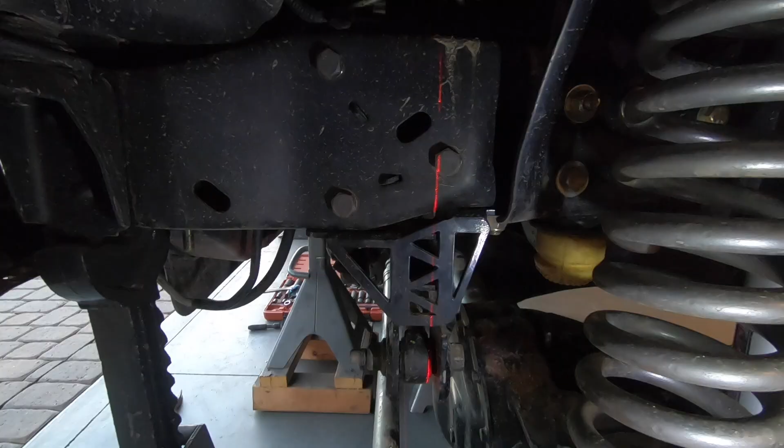Like I said on the last video, today we're gonna be working on the track bar. And like I mentioned in the last video, there's a few things that I want to change in this one. One of them is moving it back a little bit.

I basically have this laser kind of set up right here, showing where I want it. I essentially want the center of the track bar right here to match over there. So not at the ball joint, but kind of where before it starts diving into the ball joint. I want it to be straight. I don't want it to be off to the front like this one is.

So basically, this thing has to move back about half an inch. So I'm gonna take that into account when I'm actually designing mine in CAD.

So now with that being said, we also have to take this measurement, see how far up I want to go. Another thing that I'm gonna do is I'm actually gonna take off these lift springs. I have my original springs. I'm gonna throw those on here and then throw the truck kind of back on the ground and basically see how far up we have to go with this track bar.

And that's basically because I want to make the track bar work good on stock springs all the way up to these springs, which are 3-inch leveling springs, or lift springs. So I want it to work good in that whole range.

So we have the track bar that we had in our truck. This is actually the rough country track bar that they send you with the 3-inch lift kit — I call it more of a leveling kit. And then this is the OEM track bar bracket.

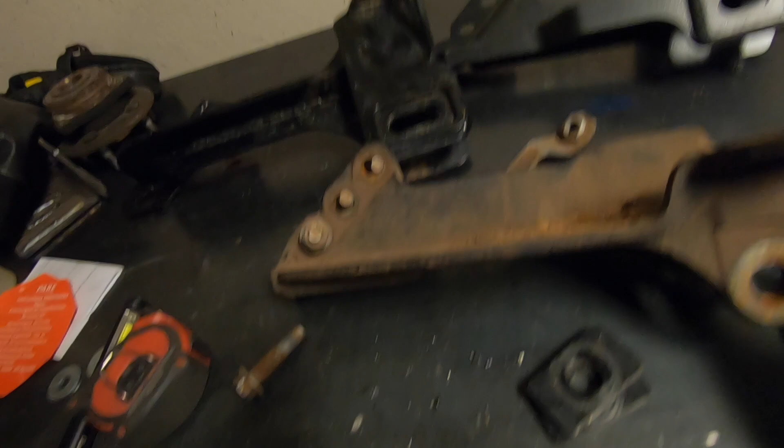I feel that I keep saying track bar. I know I can't talk. I really can't. But anyways, this is the OEM track bar bracket that you get with your 2008 through 10 trucks.

Honestly, out of all these 3, my favorite is this one. Now, I always thought that this was a drop track bar, and it's actually not. So from your mounting surface to the center of your hole is 2 3/4 of an inch, and that's the same on both of these.

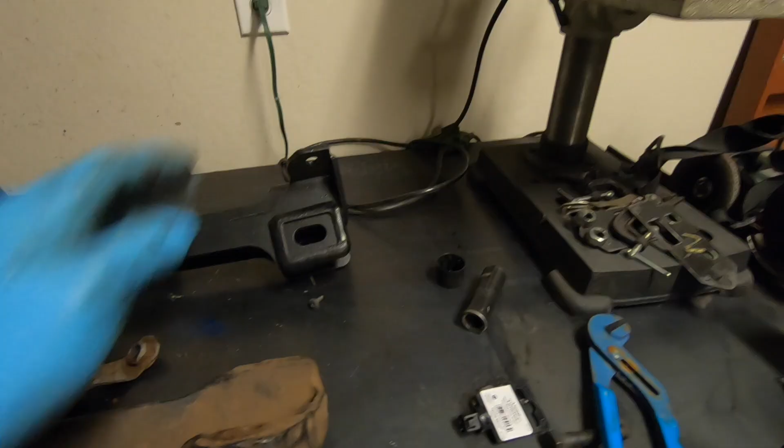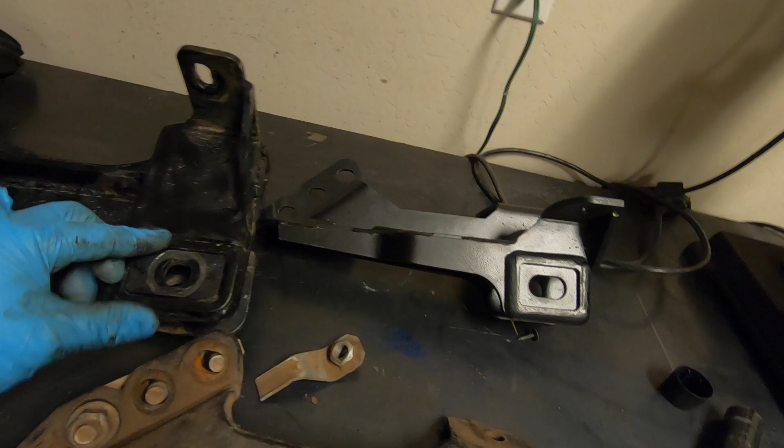The only thing they actually changed on this one is the mounting location for your track bar. As you can see, this one is slotted, and they include these shims that come with the track bar. It has 2 sets of shims—one that's offset to one side. This center one is what I was using, and with this one it'll be completely centered on that slot. The other has the hole offset to one side, so you can have it on this side, which throws your axle to the passenger side a little more, or if you flip it, it'll pull your axle towards the driver's side.

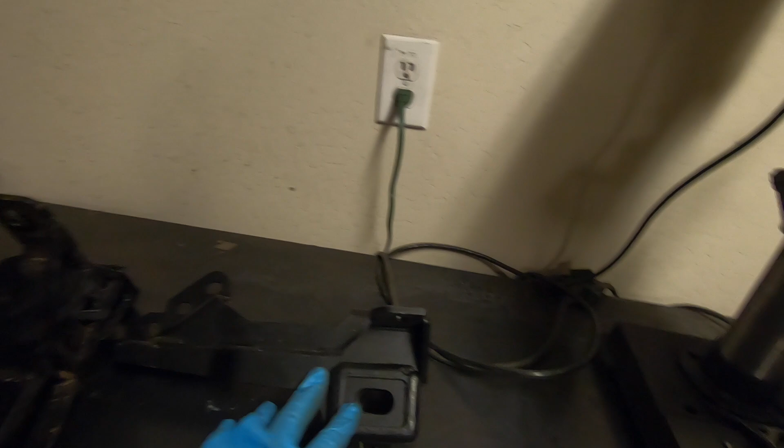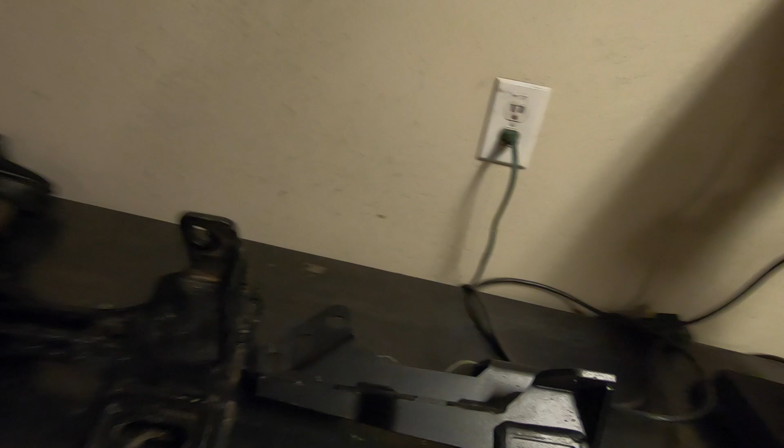Same goes for the rough country track bar. With the 3-inch lift kit, they don't give you a drop bar, just the option to adjust your track bar, maybe not even half an inch. This one gives you a little bit more than half an inch—maybe half an inch from center to the passenger side or the driver's side.

What I don't like about the one I had is that it's mainly just flat plates welded together—flat bar, flat plate, flat plate, flat plate, everything's flat plates. On the rough country, you've got a really nice bend here, and here, and here and there. This would actually be a much stronger design than one with all welds.

And their welds are way better too—as you can see, they're really nice, good welds. On this one, they're a little bit smaller, you can tell they welded them a little colder. It didn't penetrate probably nearly as far as this one did, even though they basically just stitch welded. They're stronger welds than these ones, even though they did basically a full weld. I still would trust this one, it's still a good part, but this is a better one.

You can tell they probably drew a little bit of inspiration from a track bar like this one—it's a very similar design. You can tell by this part, it's very similar on both of them. But like I said, I'm gonna make my own, make it my own. To start off, this part right here is gonna be one whole plate that'll go from this elevation and bend up to meet up with that one. That's what I want to do.

So anyways, I'm gonna start doing some CAD design. We're gonna start with the ghetto CAD, basically cardboard. Once I have a few templates, I'll take them to my actual computer and do real CAD work and start making plates. It's really boring stuff, so once I have an actual piece to show you guys, I'll come back and show it to you. I'll check back in a few—for me it'll probably be a few hours, but I'll be right back.

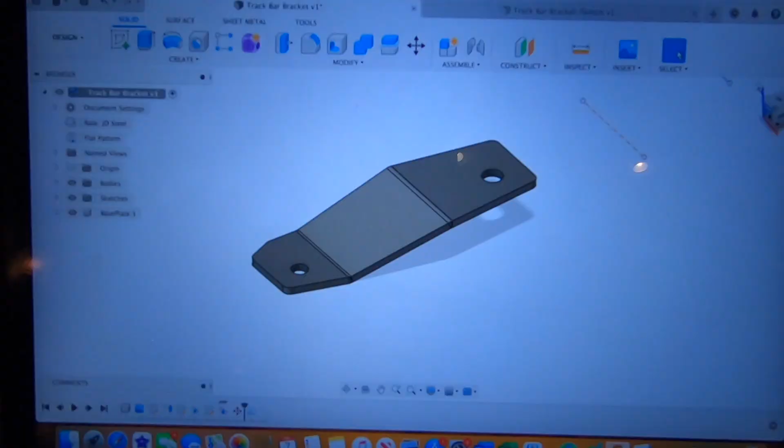Okay guys, so we were able to take our little cardboard template, just a piece of paper, piece of cardboard, and actually take it to the computer and have something we can work with. This little prototype I can then send to my CNC plasma table and get it cut, which is what we're gonna do right now, and hopefully it fits pretty good.

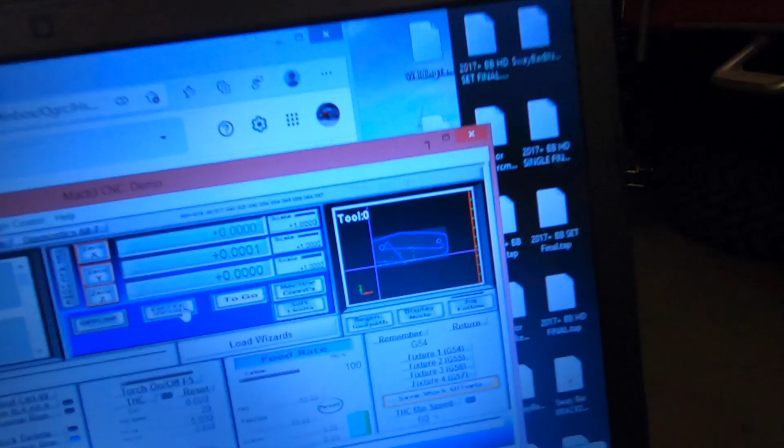Okay guys, so we sent that file to our actual CNC plasma table computer, which is right there. And now the fun is really gonna start. We're gonna go ahead, fire this thing up and get it cut. So let's go.

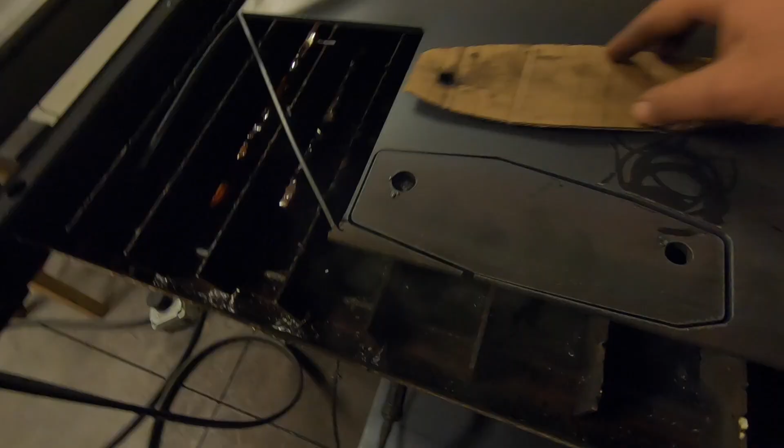Okay guys, and just like that, we went from this to this. It is freaking awesome. Now this is just kind of like the concept. It's actually gonna change probably a lot, but this is gonna help us get the actual bracket and everything set up.

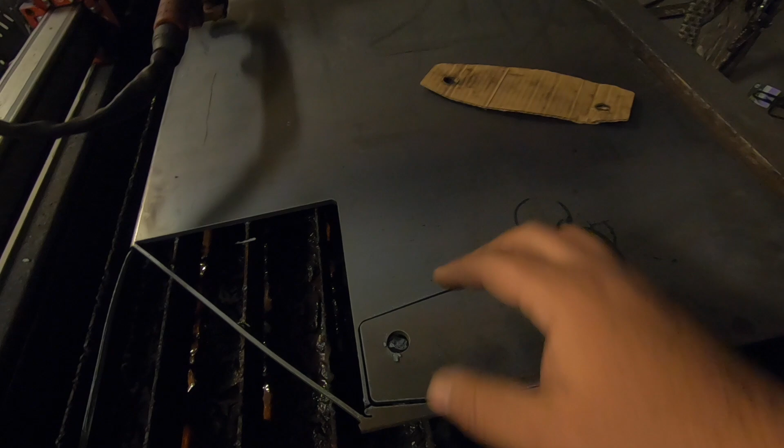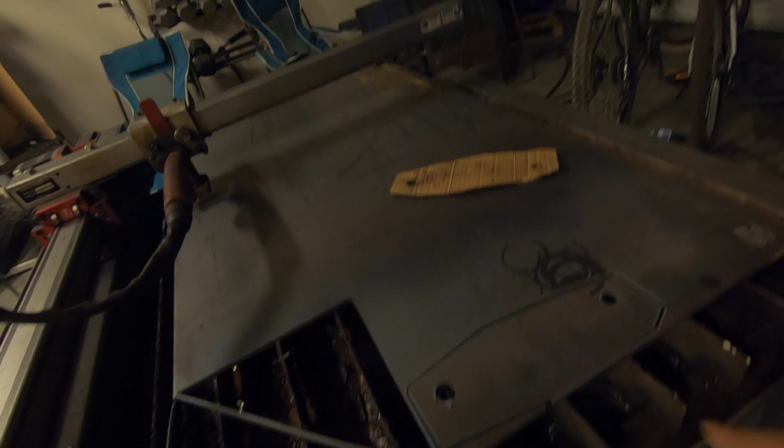Eventually, I think this is gonna end up being a little bit longer that way to kind of have more weld on the part that's gonna go to the cross member, and a few other changes. But for the most part, this is what the actual plate that goes to the frame is gonna look like. So I'm gonna get this thing cleaned up, bent on my little Swag off-road brake press, and we'll keep going from there. I'm excited.

Okay guys, I wanna show you something real quick. I mean, you obviously already know what it is, but we got this thing bent and it turned out so freaking good. Like, I am so happy and so excited about how good this thing turned out.

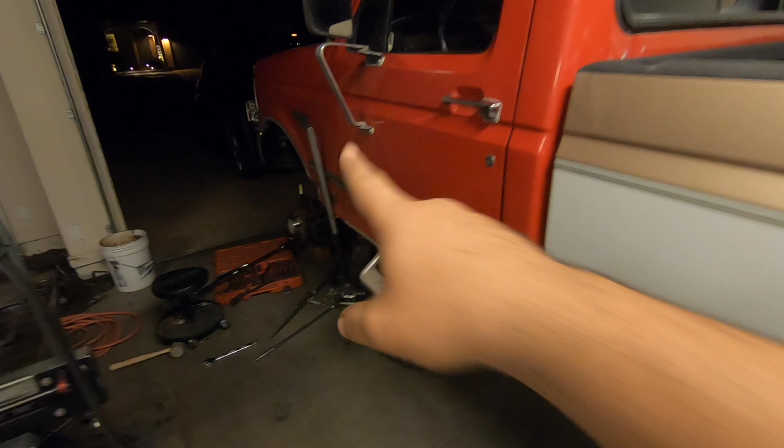And I actually already tried it on the frame. I would show you right now, but obviously it's dark and you can't see anything. I'm actually thinking about upgrading the lighting in this garage. We might actually do that after we finish this track bar thing. You know, we'll put everything back in the truck, take the truck out, and put some actual lighting in here, because the lighting here sucks. I'm really sorry about that, guys.

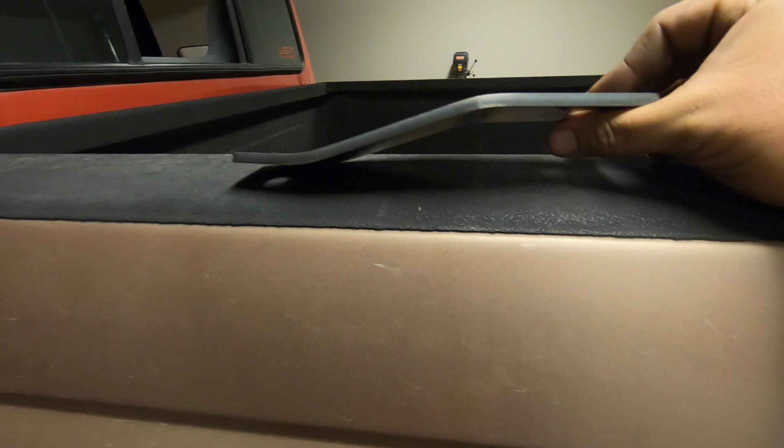But anyways, check this out. This is the base plate basically for our track bar bracket, and it turned out freaking amazing. Like, it fit perfectly the first time. And to be honest with you guys, I was not expecting this thing to turn out as good as it did. Like, I know that I had the template, and I know that I had all the measurements, but I wasn't expecting this thing to turn out perfect the first time. So I'm super stoked, super excited about the way that this thing turned out and how well it fit.

Like I said, this is the third day that I'm working on this. So tomorrow, once we have light, I will show you this thing and show you how good it fits on that frame.

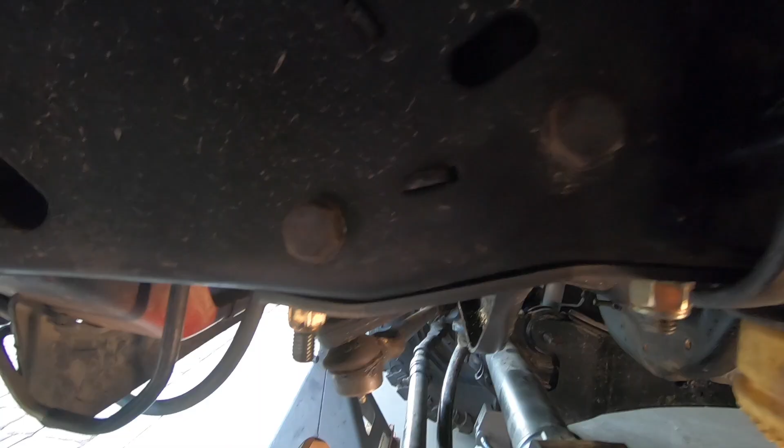Okay guys, so it's a couple days later, and we have the base plate on the frame. Let me show you. So as you can see, it is pretty well formed to the frame. I do have to make some adjustments to it, like move this bend back a little bit and actually make this hole further that way. But other than that, it fits pretty damn good. I'm pretty happy with it.

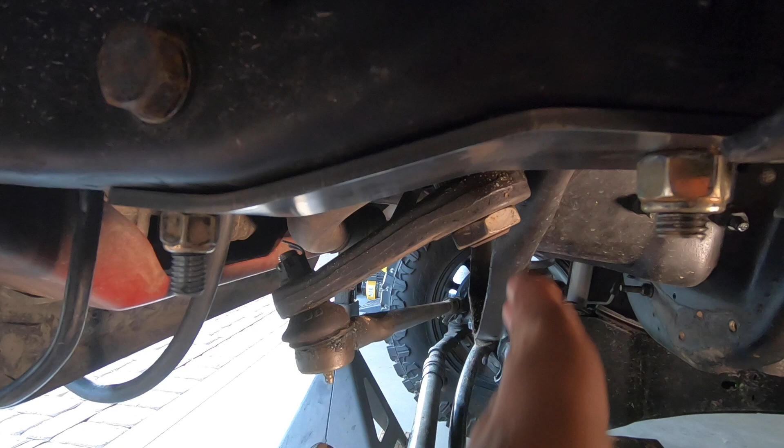So now the next thing that we got to do, it's probably going to be one of the more complex parts to this bracket, which is going to be the plate that goes from here all the way to the cross member. And basically, what we got to do is come down on this angle a little bit, and then go straight out into the back of this cross member and catch these bolts. It shouldn't be that hard.

But it is going to require several bends. So again, we have our cardboard to make the template. I'm gonna get to work on that, and then I'll check back with you guys once I have something that I like.

Okay guys, so we are losing all of the light, so I'll have to show you the little bit of progress that I have. I'm filming these videos after work, so I get home around 5:30, and I only have like an hour of usable daylight to film this, so I'm sorry. But anyways, I'm gonna show you the little bit that I have done.

Now keep in mind, this is a super rough draft of the next part of the bracket, so it's gonna look totally ugly. I know it's obviously not gonna be the final product. It's more than anything to give me an idea of where I gotta place the bends, how long it's gotta be, where the holes have to be at. But I'll show you anyways.

Okay, so this is, like I said, our bracket that's gonna come down and grab our track bar. And let me grab it real quick.

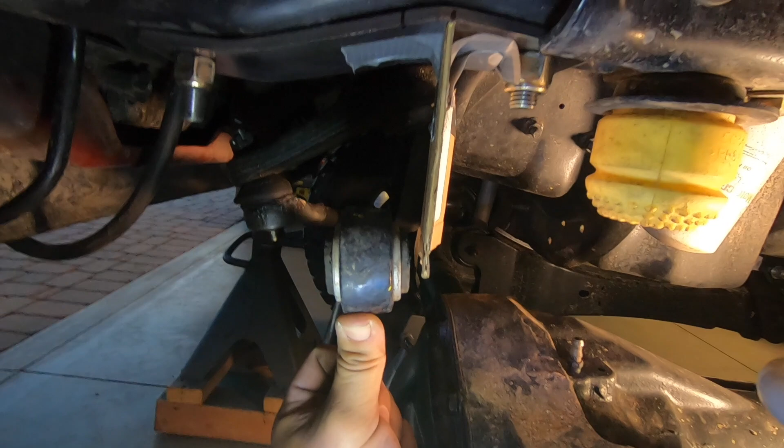I'm still not 100% sure on that, but somewhere around there you're gonna have this piece that's gonna grab the track bar, and on the other side it's gonna make another part. But anyways, that's basically the main part of it. And then...

This is gonna be impossible to show, but anyways, it's gonna go behind the cross member and bolt up somewhere right here using probably like 3 bolts right there.

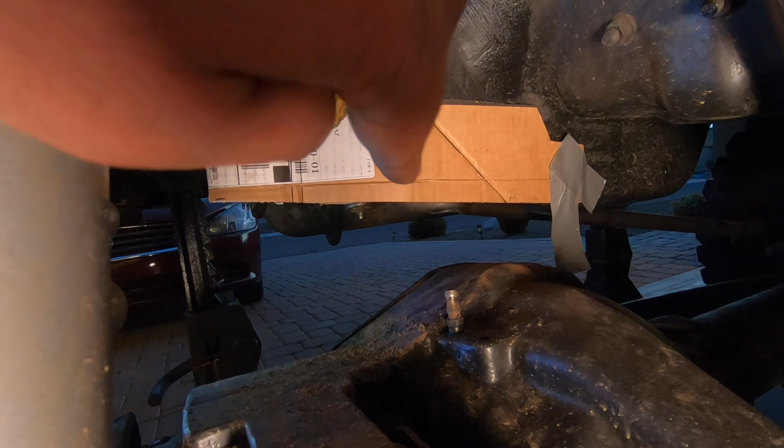And then it's gonna have one bend there, and another bend there, and then one about here. So it's gonna have quite a few bends. It's gonna be interesting trying to get that part just right.

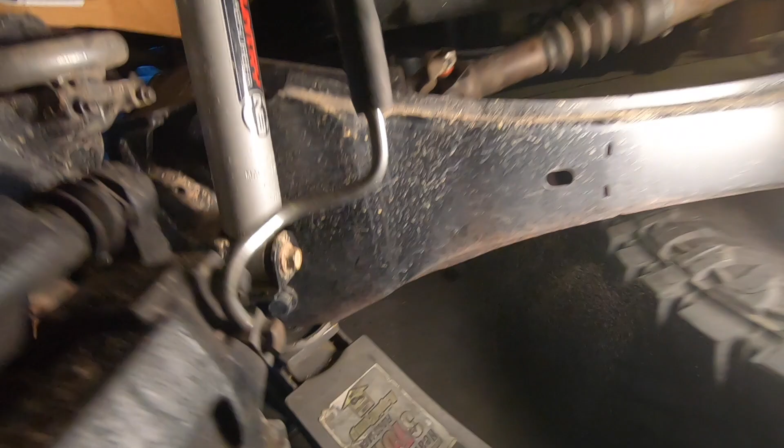So it's obviously a little bit blocky. We're probably gonna end up taking a little bit of material off of this whole area just so it clears the pumpkin on the differential. And just several other things like that.

I'm gonna continue working on this thing, trying to get it right. Again, I'll check back in once I have something interesting to show you guys.

Okay guys, so I don't know how long it's been since that last clip, but I've actually been working on the track bar bracket on the computer ever since then. So it's been like a week or two. But let me show you kind of what I have now.

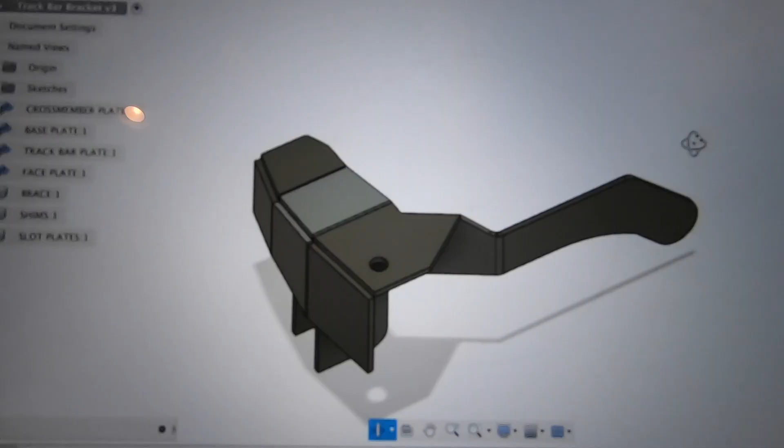Keep in mind, it's not finished yet. I still have to do a lot more things to it, but I at least want to show you something because I want to move on with this thing. So anyways, let me show you. I don't know how well you can see, but basically this is what I have so far.

So now we're still missing a few things. We're missing our holes over here, and another hole over here. And I still kind of got to shape this, do some stuff down here.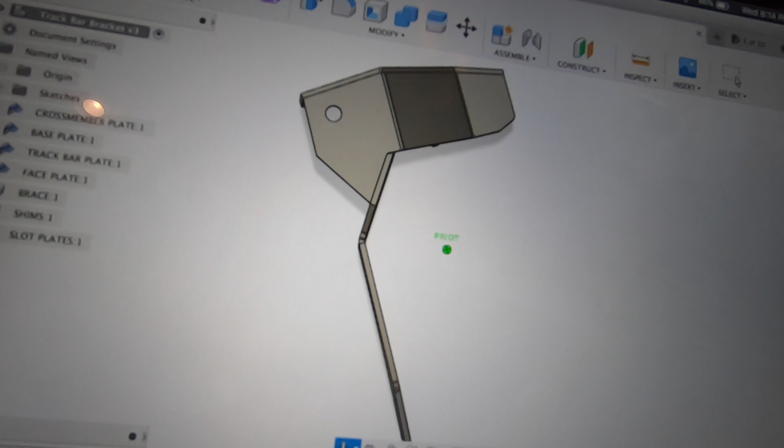But other than that, it's looking pretty cool. I like it. I'm excited for this thing. But yeah, basically that's at least, you know, we call it the rough draft of the bracket.

I think we can have it done hopefully by next week, and throw it on the truck, do some testing with it, make sure that it works good, that it fits good. But yeah, I'm super excited about it. I can't wait, again, to throw it on the truck, to get it put together.

So we actually have to build it, put it on the truck, take it back off, and I actually got to make a jig to be able to make more of them consistently. So we're still quite a bit away from being able to sell that one, but we're moving forward, which is what you want, progress, because I'm really excited about it.

But anyways, I think that's gonna be it for this video. It's still gonna be a while before I can get that thing done. Hopefully in the next video we can at least get it fabricated and thrown in the truck.